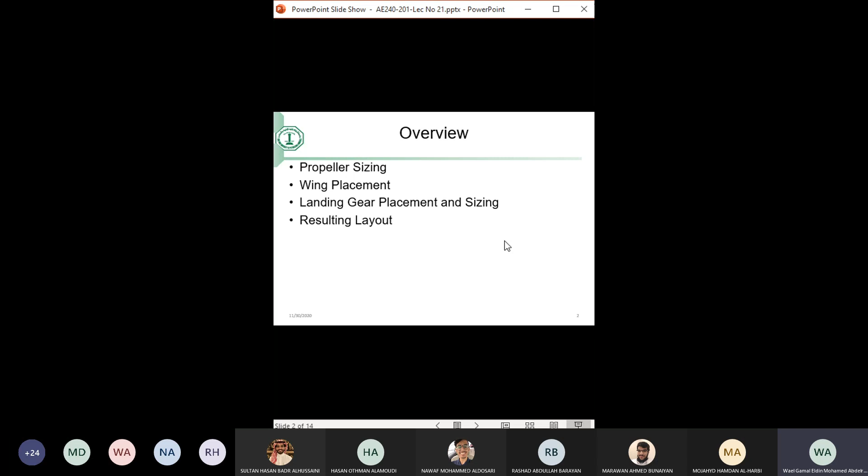So today we are finishing with the last two components, basically the propeller of the aircraft. We are going to determine how large is the propeller, as well as the sizing of the landing gear. What is the shape of the landing gear? Where are we going to place it, and how big the tires and the wheels are for this aircraft? So we will worry about the propeller sizing, wing placement, landing gear placement and sizing, and we're going to show the final layout of the aircraft.

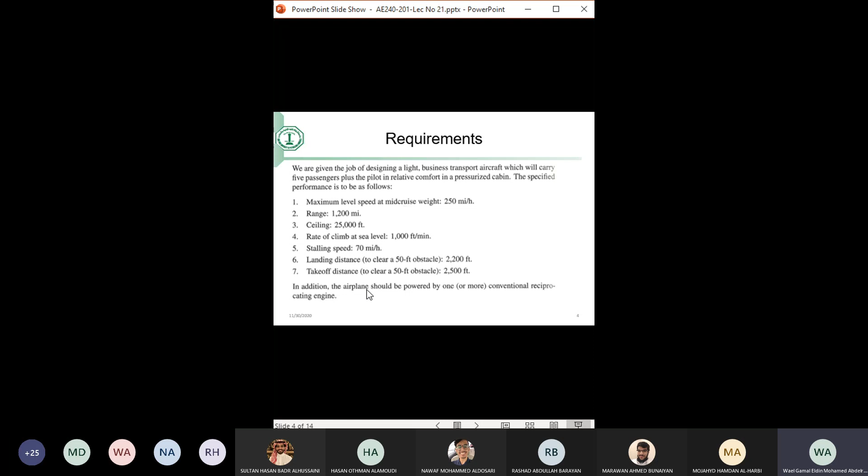We are still here in the configuration layout. We will finish it today, inshallah. Wednesday, we are going to take, inshallah, step number 5, the better weight estimate, and on Monday, the performance analysis. We satisfied all the requirements in the process so far. We maybe have exceeded the requirements. We are not sure, and we are going to check next time.

So moving on with the propeller, if I ask you what type of propeller you are going to have, are you going to have a 2-blade propeller that has 2 blades only, or 3 or 4? So first we have to make that choice. And the rule of thumb is the fewer the number of blades, the better. If you can satisfy all the requirements and all the constraints on the propeller design with only 2 blades, that would be better, because it will mean higher efficiency of the propeller. The propeller efficiency decreases with the number of blades.

Think of it from the point of view of air approaching the aircraft. If it sees only 2 blades, this is less obstruction than if it sees 3 or 4 blades. Okay, so the fewer blades should be our first choice. So we should start always with 2 blades. If you can satisfy all the requirements with 2 blades, so be it. If not, try 3. If not, go with 4.

Now, what are the constraints that we need to satisfy? There is no condition in the requirements that says the propeller... No, there are some conditions. One of them is the requirement of size. The propeller cannot be extremely large such that the blade would hit the ground. Right? So you should have some clearance under the propeller. It shouldn't hit the ground. The second requirement is that the fastest point on the propeller blade should have a speed less than the speed of sound.

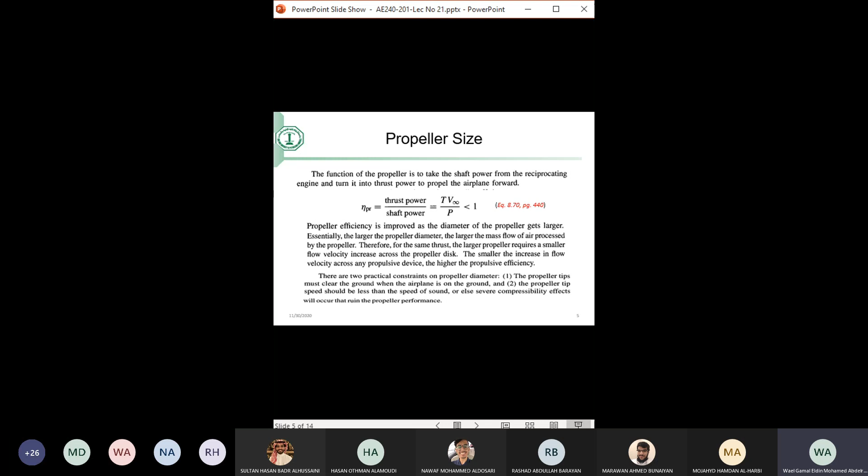I always give this example, it is very similar to your car. If you have a huge engine in your car, a V8 engine, for example, okay, 300 horsepower something, you cannot put on it tires that are R13, just like small cars. It simply would not deliver that power. Okay, so propeller and engines have to match. These are the 3 constraints. If you can satisfy them with 2 blades, so be it. If not, go for 3. So let's start one by one.

The first condition that we will satisfy in this example of 5-passenger aircraft we are designing is the horsepower matching. So what you see on the screen now is an empirical relation. Empirical means it's not rigorously derived. There is no mathematical derivation, but it's the typical industry norm between the diameter and the horsepower. So for example, if in your project the horsepower is about 100 horsepower, that tells me the diameter of the propeller would be around 70 inches, because the unit of this equation is in inches.

So I would put 100 horsepower to the power 0.25 times 22, probably gonna be 100 inches, which would be 2.5 meters. No, 100 inches? No, I think it would be less than this, maybe 70 inches. Okay. So that would be like 1.7 meters. Not bad for a 2-blade propeller. Not bad in a sense that I believe with the dimension that we have, we'll have enough room under the propeller. But I have to keep that dimension in mind when I put the length of the landing gear. Okay.

For a 3-blade propeller, we have a different equation, and there are similar equations for 4-blade and more propellers. So in this design, we will start with 2 blades. For 2 blades, we will put the horsepower of this example that we have. 360 horsepower gives me a propeller with diameter 8 feet. Now 8 feet, that's about 260 to 270 centimeters, a considerably large propeller.

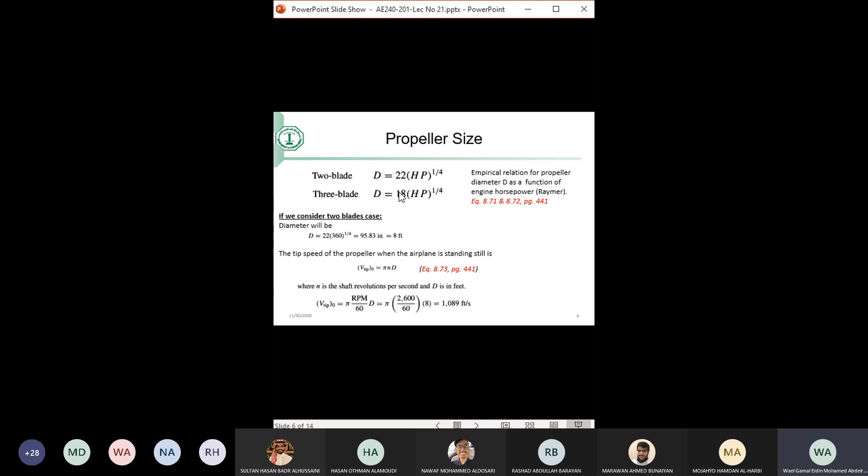But how can I reduce the diameter of the propeller if I have to deliver the same power? Easy, use 3 blades. 2 blades is not enough. We will use 3 blades because the number for 3 blades is smaller. With 3 blades, the diameter becomes 6 feet. The tip speed drops from 1089 to 889. Combined with the forward speed of the aircraft, the net is now 962, below the speed of sound. So we now have a 3-blade propeller that delivers 360 horsepower, rotates at 2600 RPM, and the tip stays below sonic speed. Any questions up to this point on the sizing of the propeller?

In terms of the sizing, do we care about the pilot view? Well, that's an interesting question. Would the diameter affect the pilot view, or the number of blades? No, the diameter. Really? Because no matter what, it will cross the field of view of the pilot, because the engine is just like in front of the pilot. So if the diameter is 2 feet or 6 feet, it will still cross the field of view of the pilot, unfortunately.

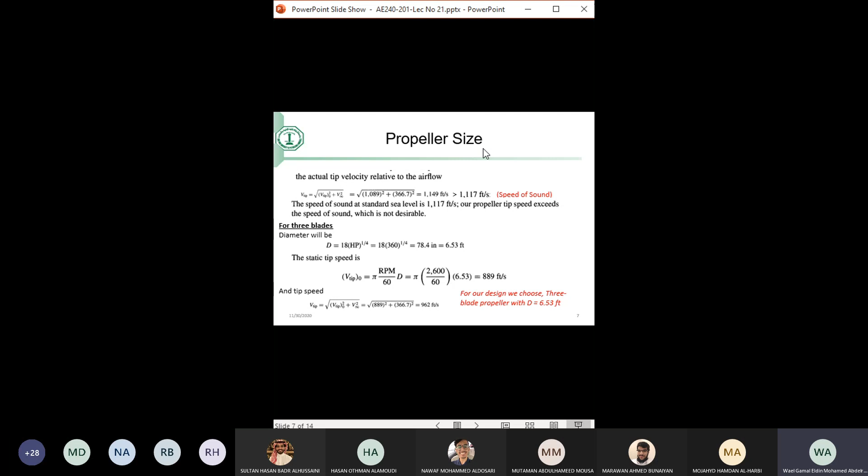Okay. The last part is the landing gear and the wing placement. And you will probably be asking, why do we have the landing gear and the wing together? We already designed the wing. Yes, we designed the wing, but we did not place the wing. We said the wing is going to be a low wing. Yes, but we didn't say where are we going to put it.

Is it going to be here or here or here? At what distance from the nose is our wing? We did not specify that. Okay. The same for the landing gear.

In order to do this, we have to first understand what are our different options. Just like with propellers, we knew we had options: 2 blade, 3 blade, 4 blade. Just like in tails, we knew we had T-tail, conventional tail. In engines, we can have the engine in front or the back. Also in the landing gear, we have options.

One option is what we call the tricycle landing gear, where the aircraft touches the ground, when it is on the ground, on 3 points: 2 main wheels on the sides in the back and 1 nose wheel in front. In this case, the CG would be in between the main wheels and the nose wheel. Probably it will be closer to the main wheels to make the reactions on them much more than the reaction of the weak nose wheel.

If you look at this aircraft from the top, these are the touch points with the ground that you will see. The 2 main wheels and the 1 nose wheel. We call this the tricycle configuration, and it's very good in the sense it is stable. That's why all kids' bicycles are tricycles, because they are stable.

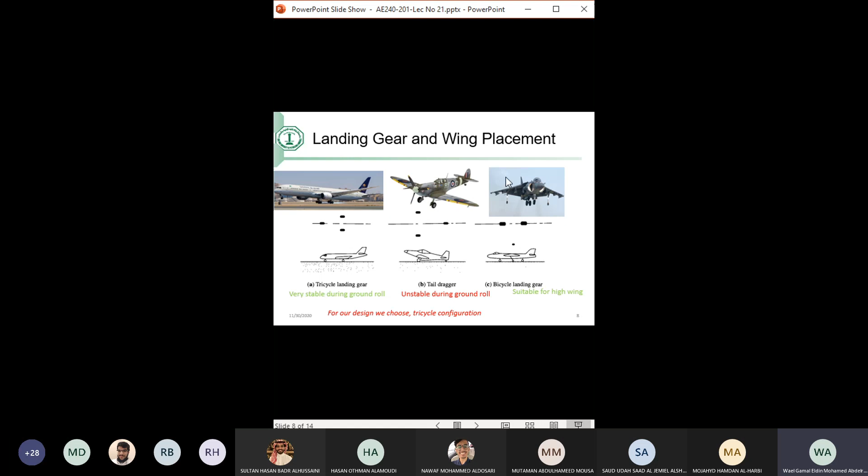Okay. Now comes the question. We have chosen the type of the landing gear. Where are we going to place the landing gear? Now, to answer this question, we have to know where the wing is, because we will probably retract the landing gear in the wing, and because of the nature of the relationship between the wing, the CG, and stability of the aircraft. Since we haven't taken a stability course, only a simple introduction in AE220, let me remind you of the following.

There are several important points along the length of the aircraft. One of them, of course, is the CG, and we have found the location of the CG of this aircraft from last time. The other important point is where the wing is, and when I say where is the wing, where is the aerodynamic center of the wing? The aerodynamic center is the quarter chord point of the mean aerodynamic chord, not the root, not the tip, but the MAC. So where is the quarter chord of the MAC? We call this the aerodynamic center.

Now the stability of the aircraft is related to the relationship between these 2 points as follows. We are going to have the equation here without proof. We will be using it and you will derive it in stability courses. Probably you have seen it in AE220, but you will see it again in 426 and 313. The relationship is like this. The location of the aerodynamic center, XAC, of the wing body without the tail, is equal to the location of what we call the neutral point. I will get to that in a second.

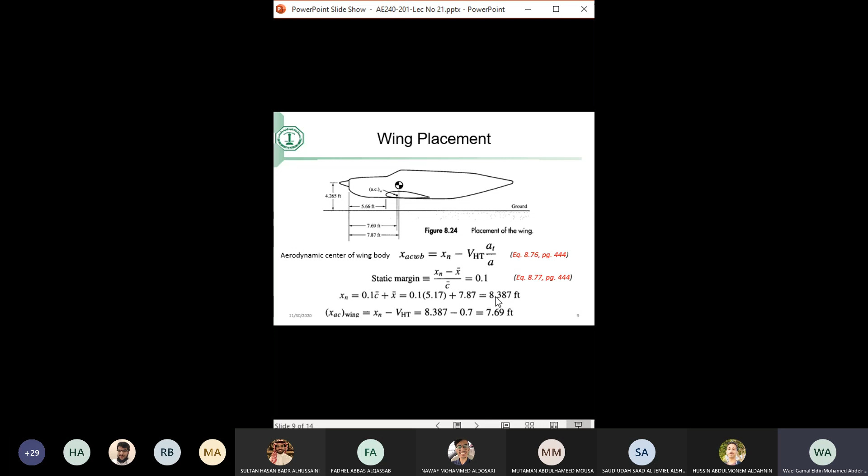Okay. With the wing placement comes the landing gear. Now that we know where the wing is and where the CG is, we have to place the landing gear. Typically, the main landing gear will be slightly behind the CG. So the CG here is at 8.3, sorry, 7.8. So this one was chosen to be about 50 centimeters behind the CG, about 8.9 feet.

The nose wheel will be very far forward so that it will have less reaction on the ground, because the weight on the CG will be divided between these two. The main wheel will carry more because it's near the CG. This one will carry less because it's far. So we tend to put the nose wheel as far forward as we can.

This one can be even further forward here, and in this case it will retract backward. But in this problem it was decided, let's make it a little behind and retract it forward. So in this design, the landing gear will retract forward. That's why we have a distance of about 2 feet, because we expect the height here to be about 2 feet so that it can rotate and be stored below the engine or in front of the engine. So it is in that room that we have in here.

Okay. Now, don't ask me why it's 8.9, why it's not 8.8. Well, you can have it 8.8. So it's not like an equation that will tell you this number. But once you settle on this number, it will affect the calculations that we are going to do from now on. For example, it will tell me what is the force that's going to be applied on the wheel.

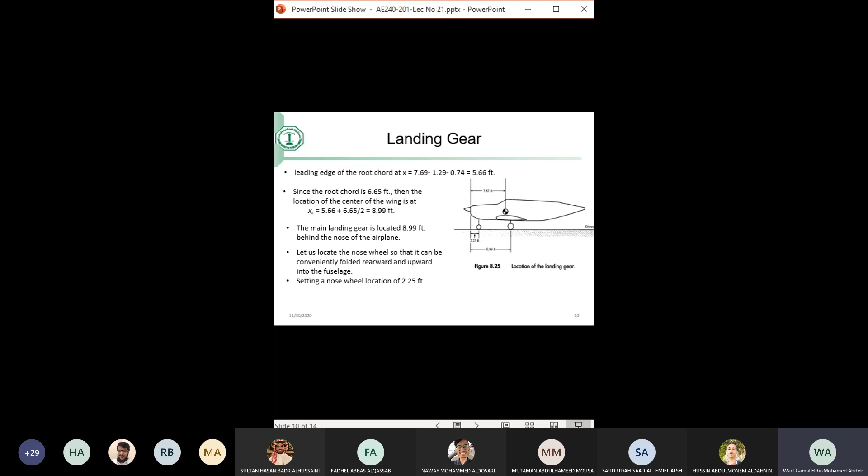Okay. Now, why are the forces important? Remember, these forces will change if I move this wheel a little bit behind. If this is not 8.9 feet, if it's 9 feet, for example, the distance will change and there will be less load on the main wheel and more load on the nose wheel. So these forces are important because they determine how big the landing gear is.

So with these loads, I should go and check with manufacturers. I want a tire that will carry that load. How big should the tire be? But before we do this, please don't fall into a very simple thing that students usually forget: this reaction is not a reaction on one wheel, it's the reaction on two, because I have two main wheels, one right and one left. So the number we get here must be divided by 2.

So the F main, which is 4,300, divided by 2 is 2,150. So you need each tire of the main wheel to carry 2,150. And the tire on the nose wheel, 857. If you have 2 nose wheels, then you need to divide this by 2 as well. But we have only 1 nose wheel. So we ask manufacturers, I want to carry this load on the nose wheel and this load on the main wheel. How big should the tire be?

If you go to the tire shop and want to buy a new tire, he asks what type of car you have. They have a table: this car goes with this tire, this car goes with this tire, R13, R14 or whatever. So it's exactly the same here. We have a relationship between the load on the tire and the diameter of the wheel or the width of the wheel. And this relationship is in terms of 2 parameters, A and B, constants typically from the industry.

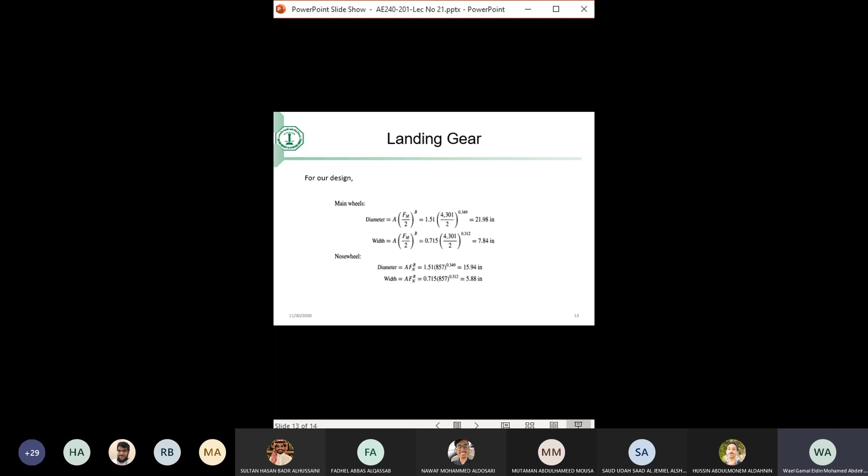So if you look at this tire and we use the A and B, it will tell me the main wheel is 22 inches and the width is about 7.8 inches. And for the nose wheel, the same turns out to be 15 and 5.8. So that's the sizing of the landing gear. We have answered the question, what type of landing gear? Where are we going to place the landing gear? And what's the size of the landing gear? I'll stop here to see if you have any questions in the sizing of the landing gear.

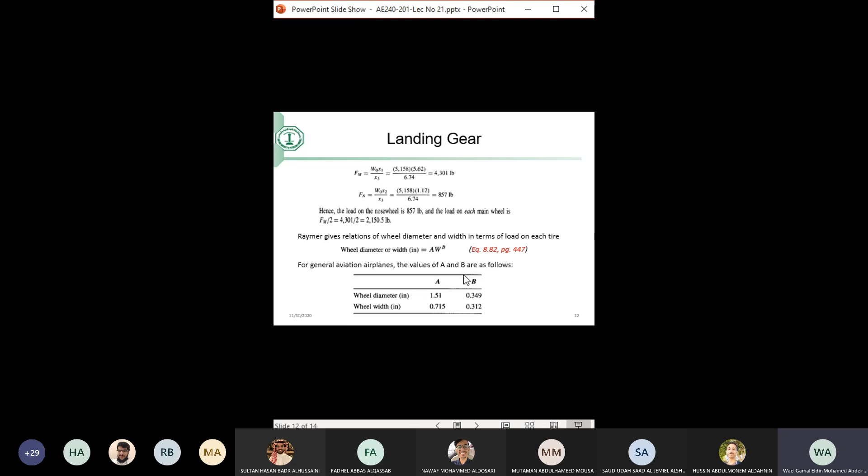Okay, so now we have everything to draw the aircraft. Now I can get the full drawing. Last time we determined the length of the aircraft, so I can know the length. What's the width? I can find the width. We have designed the tail last time: the area, the span, the root chord, the tip chord. We did the same for the wing.

Today we located the wing itself, so we know exactly where this quarter chord point is going to be. We have designed the landing gear, how big they are. We have placed the seats. We know we will retract the tires in the wing and the nose wheel will retract forward. We have designed the propeller.

And the question that came earlier today, how do we know that it's not going to hit the ground? Well, we draw the propeller here with the dimensions that we had, and we ensured we have at least 6-inch clearance. Should be at least 6 inches, about 15 centimeters below the propeller until the ground, maybe more, but that's the minimum. And that's it. That's the resulting layout.

3 weeks back, we started with only the requirements, and now we have a full drawing of the aircraft. When we were discussing conceptual design, students had the impression that conceptual design means you take a piece of paper and a pencil and draw a sketch of the aircraft, just like artistic drawings. And I always tell them no, conceptual design is a full design of the aircraft's main dimensions, main components, to ensure the requirements will be satisfied.

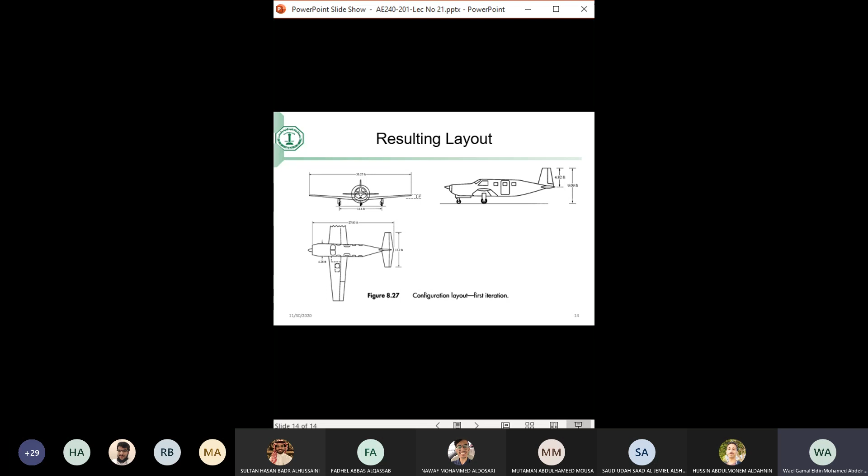What is the total weight of this aircraft? I will now know where the seats are, where the landing gear is, how big the landing gear is. I will put all these weights together and find the total weight. It will go above what we have calculated, or maybe it will go down. So what we will do on Monday and Wednesday, inshallah, is get a better estimate of the weight and a better performance analysis. We will check all the requirements again. Did we satisfy them or not?

If yes, let's finalize the design by adding fairings, final touches and optimization, which means improving performance. If not, I have to change something. Maybe I can make the wing a little bit bigger. Maybe I can add winglets. Maybe I can make this landing gear bigger and so on. And this cycle would go on until everything is satisfied and we move on.

The one thing that we will not do is go and do it again this semester. In 427 we do it twice, but in here we do it in a single round. So we will check the performance on Monday, see if it satisfies or not, make adjustments, and that will be the end of the project. Any questions?